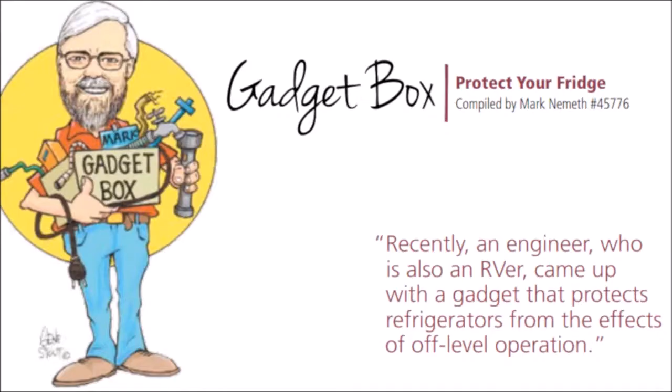I also write a column called the RV Gadget Box, where I test and review neat and useful RV gadgets. That's how I came to find out about the Fridge Defend by ARP. I had the opportunity to fully test this little gadget, and I was very impressed with what it does. Quite simply, it protects your RV fridge from the most common causes of failure.

This video will demonstrate how the Fridge Defend by ARP protects your investment by keeping your RV fridge running like new. The Fridge Defend keeps your fridge boiler operating within safe limits, and there's no other device that can make this claim. If your RV has a Dometic or Norcold refrigerator, there will be an access panel on the side

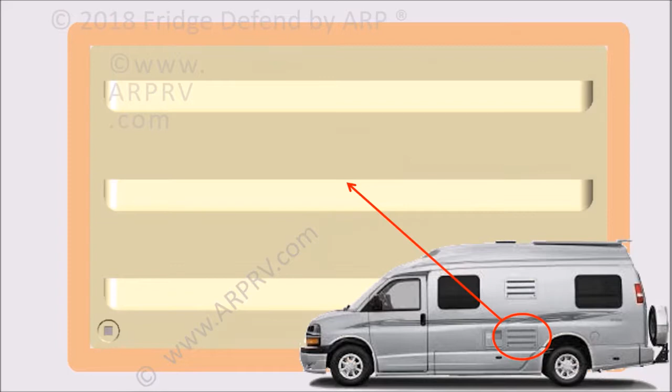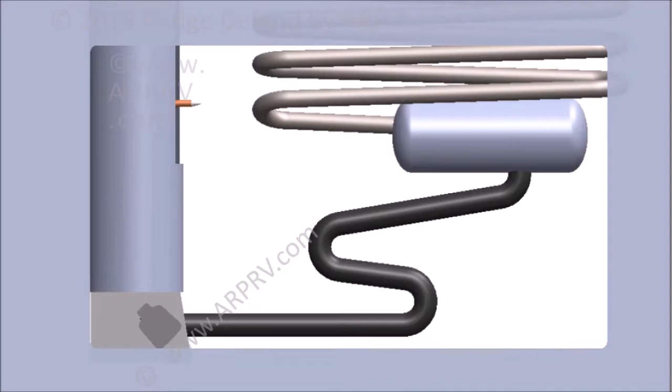of the RV. Opening this panel will show the fridge cooling unit. You will see a boiler housing either on the left or right side of the compartment. This boiler housing is generally a sheet metal cylinder holding insulation with an electric heater coming out of the side and an LP gas burner assembly at the bottom. Let's remove the sheet metal boiler housing that holds the insulation and also the red flue tube.

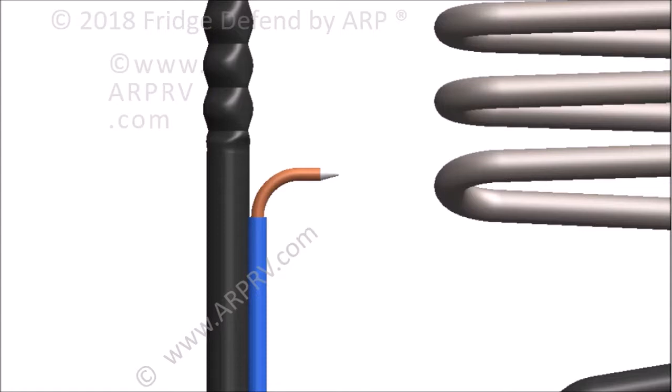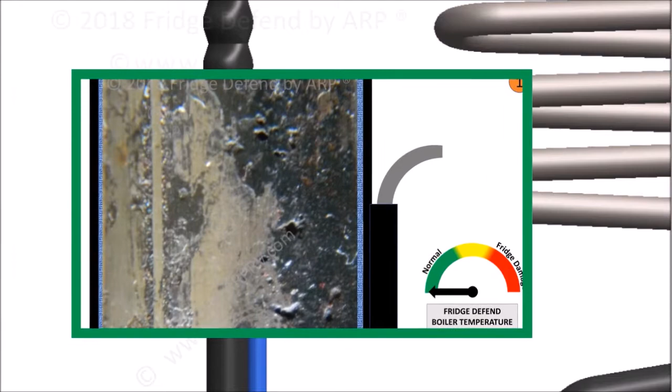Now, all that's seen is the black boiler tube and the electric heater. Let's zoom in on the boiler process tube and the electric heater. The zoom is actually a cross-section of the boiler to show what occurs inside the boiler. Starting from the outside of the boiler, black is the boiler process tube, blue is the rust prevention layer, and inside is a photo of an actual Dometic or Norcold boiler that has failed.

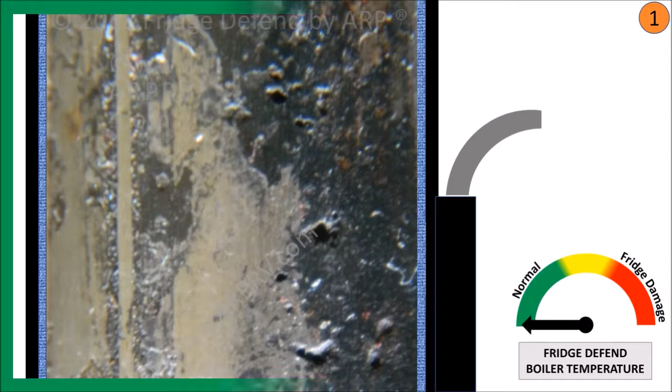Please note that there are black spots in the boiler photo. These spots are rust pits that ultimately cause the refrigerator to fail. Now we will remove the photo of the failed refrigerator in order to demonstrate how the heart of your fridge works: the boiler process. The orange fluid within the boiler is called the working fluid. This liquid is a mixture of water, ammonia, and the rust preventer.

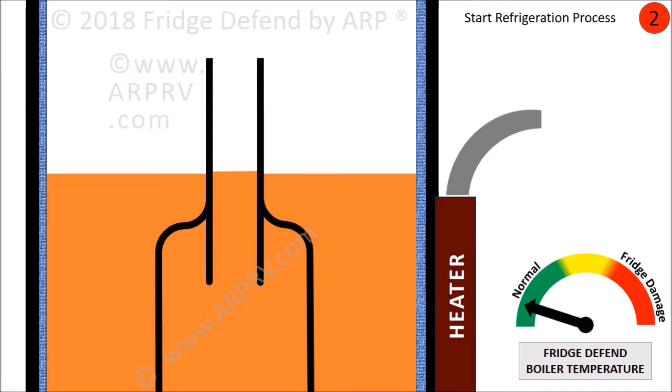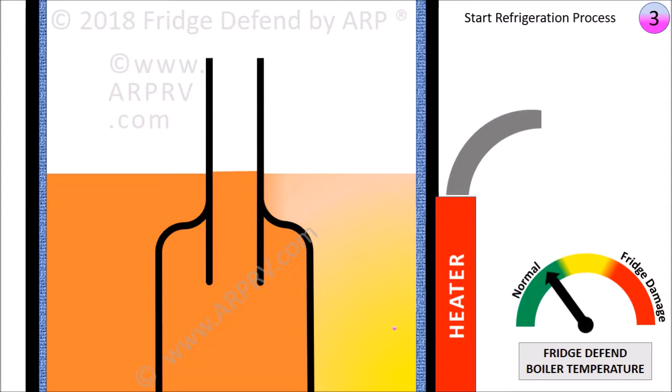Keep an eye on the Fridge Defend boiler temperature gauge. We start the refrigeration process by turning one of the heaters on. The heat is then transferred into the center of the boiler tube where the pump assembly is located. Ammonia, which has a lower boiling point than water, begins to boil off and is represented as a purple gas. The purple ammonia gas is separated from the orange working fluid, leaving a yellow fluid that we call the weak solution. The temperature will continue to rise to the normal boiler temperature.

When the boiler hits its normal temperature, the yellow weak solution liquid is being separated from the flow of orange working fluid. Within the center boiler pump, the purple ammonia gas fills the bell-shaped accumulator. Once the accumulator is filled, the purple ammonia gas overflows into the center percolator pump tube. The accumulator produces large bubbles of ammonia in order to start the fluids flowing in the system without producing excess heat. Notice that each ammonia gas bubble pushes a little weak solution liquid up the pump tube. The yellow weak solution liquid will drop down once it exits the pump tube, and the purple ammonia gas rises up to perform the refrigeration process.

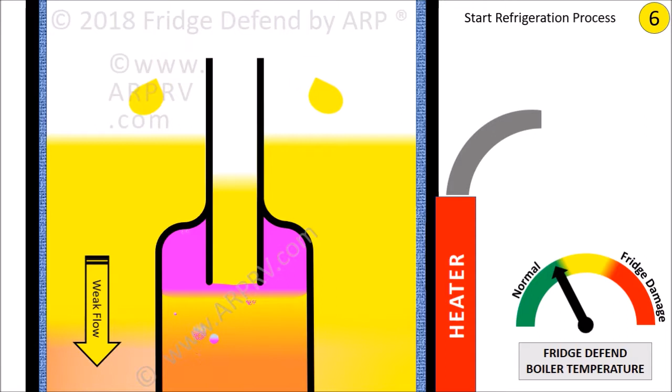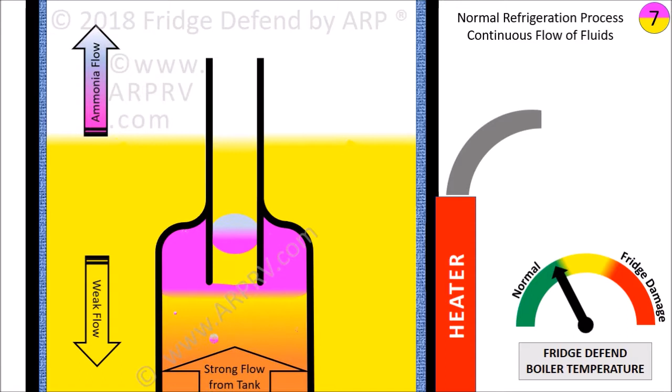The heat source at the boiler drives the refrigeration process by distilling and separating the fluids. This also provides the pumping action. The Fridge Defend will measure normal refrigeration temperatures if this process is working normally. Now that the normal refrigeration process is understood, we'll show you how the flow of fluids can be disrupted, leading to a lack of cooling within the fridge or possibly even failure of the fridge itself.

If the ammonia is not returned to the strong solution in the boiler, then there is nothing to drive the bubble pump. There are many reasons why the ammonia may not return to the boiler. A partial list includes off-level operation, such as climbing long hills, or a stay at a rest area or store, or having a roadside emergency, such as a flat tire. High ambient temperatures or strong winds can prevent air circulation. You can have the failure of a heat source, and freezing temperatures can also cause this problem, just to mention a few.

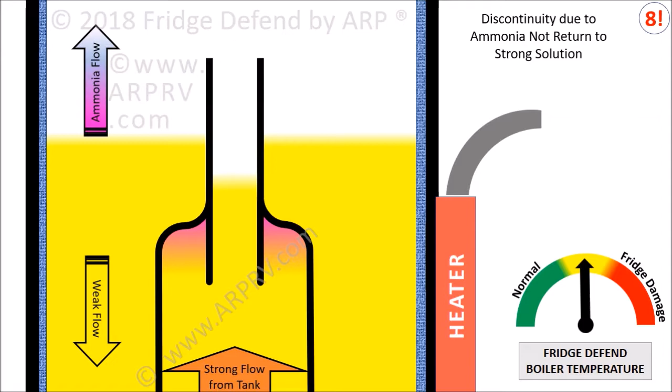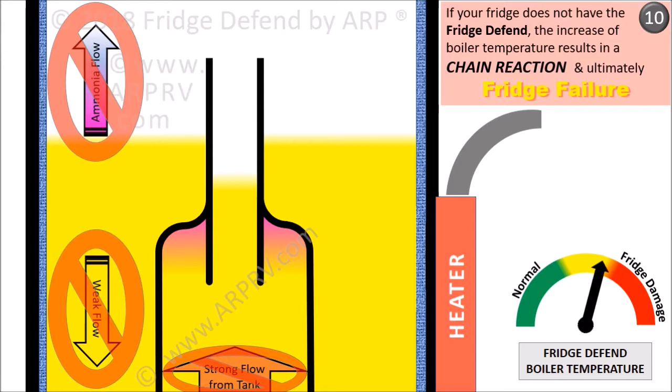When the ammonia stops boiling, the temperature rises and the bubble pump stops. The Fridge Defend detects the no-flow condition by the rise in temperature, and it turns off the heat, thereby preventing the destructive chain reaction that leads to fridge damage. The Fridge Defend will restart the fridge when it is safe. Without the Fridge Defend, the temperature will rise until the water in the system begins to boil.

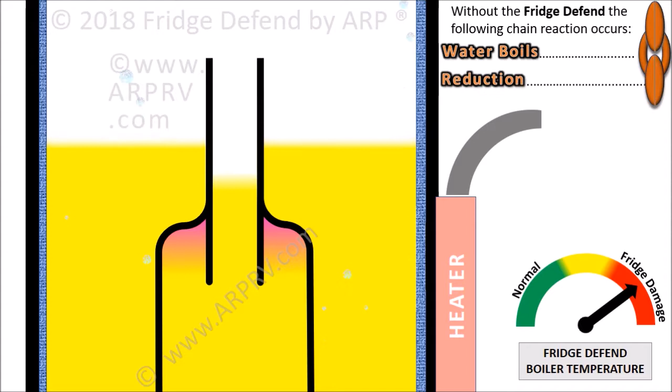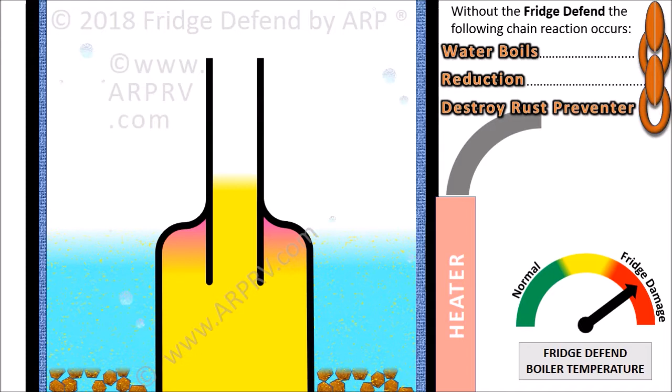The water boiling has two effects. One is that the steam increases the internal pressure of the cooling unit. The second effect is that the fluid next to the heater is reduced, and this in turn concentrates the rust prevention chemical and causes it to precipitate out of solution. The rust prevention agent forms crystals, which changes the rust prevention agent so it can no longer protect the cooling unit from internal corrosion. The level of the light blue water is further reduced, and the temperature reaches dangerous levels.

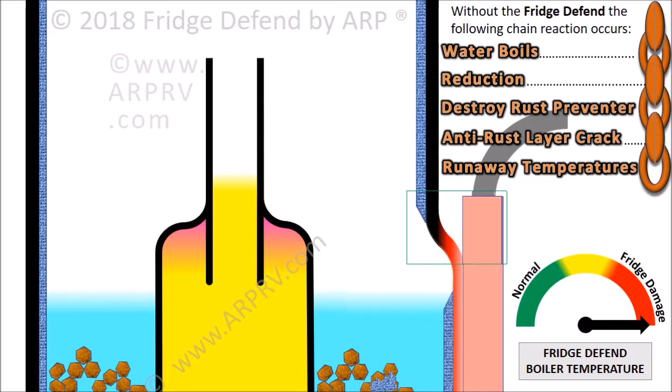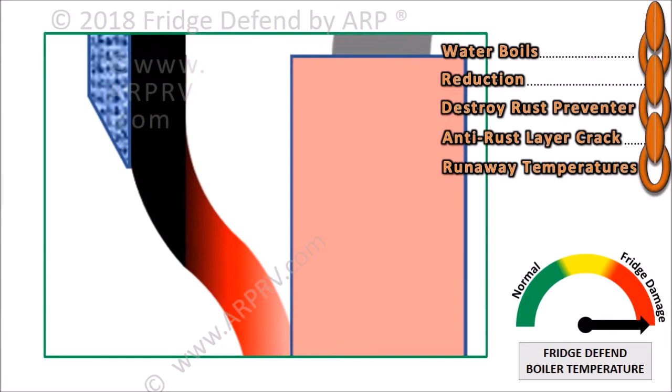The boiler warps due to high internal pressure combined with warping due to heat. This results in cracking and flaking of the dark blue rust preventative layer, protecting the black boiler tube. Now let's zoom in on the boiler tube, where rust pitting is promoted by the loss of the rust prevention agent in solution combined with the loss of the rust prevention layer. Rust pits form which further weaken the cooling unit, and this is all due to runaway temperatures. Thus, the final blow is twofold. When the metal is stressed due to excessive heat and weakened by rust, the fridge is destined for failure.

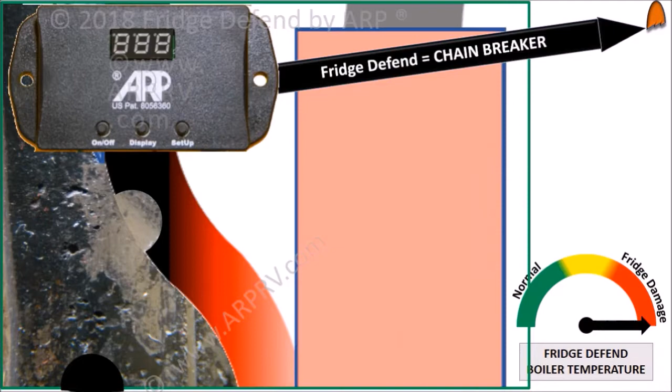The Fridge Defend by ARP breaks the first link in the chain of destruction. If the water in the system is not allowed to boil, the fridge remains reliable due to preservation of the rust protection and low thermal stress. Can your fridge live without the Fridge Defend by ARP?